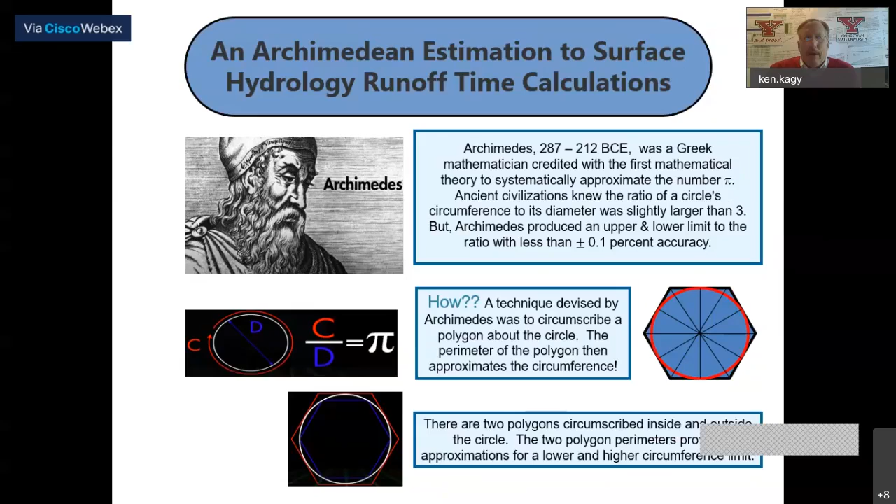So he devised a technique. He circumscribed a polygon about the circle and inside the circle, and was able to use the Pythagorean theorem to estimate the edges of those triangles. He drew triangles from those polygons, and the more polygons you have, the more accurate that estimate is going to be of the circumference of the circle. So I think he started out with a six-sided polygon divided into 6 or 12 triangles, and then kept increasing it until he felt he had enough triangles to estimate the arc of the circle a little bit better.

Back in about 250 BC, he had a 96-sided polygon, and based on the outside and inside of that polygon, he estimated pi was somewhere between 22 over 7 and 223 over 71. That was within about 0.1% accuracy, which is amazing considering he didn't have a calculator. In fact, they didn't even use decimal points back then.

So all they had was fractions. He did some mathematically ingenious things, and he's also known for the Archimedes principle, where he used the king's crown. The king was concerned that his crown wasn't completely gold, so Archimedes was able to submerge the crown in water and estimate the density of the jewels and metal in it. It was amazing. He was probably the original master of rational thinking back then.

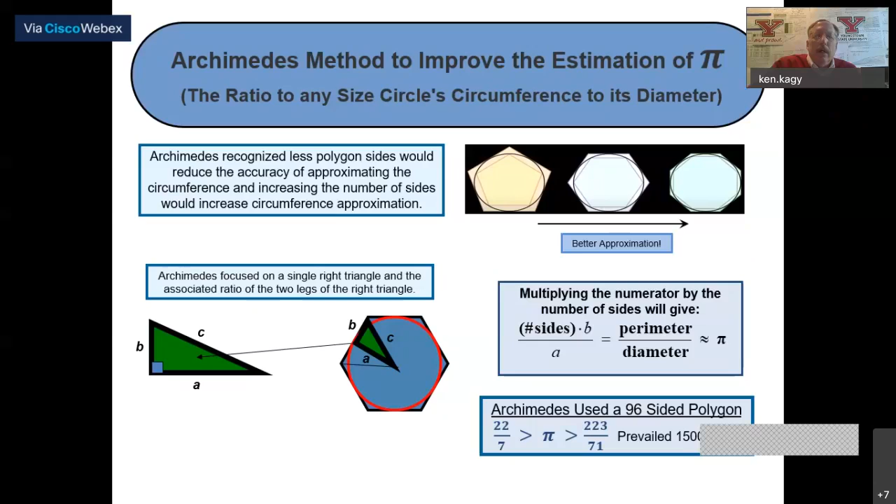But anyway, let's talk about how this really applies to hydrology. I'm going to start from some of the basics. I know some of the audience really understands these fundamentals, but sometimes I have people in my audience that don't understand the basics of hydrology.

Factors affecting stormwater runoff include surface conditions, soil type, watershed size, length of runoff, basin slope, and rainfall depth. Those are all different factors that affect this. What we're going to look at in this study is 4 different types of surface runoff coefficients that are commonly used. We're going to evaluate and compare those runoff coefficients.

We're going to use NRCS's segmental equations, sometimes called velocity equations, and graphically display what those really look like. Then we'll look at 3 different time of concentration empirical equations, and compare all 4 of these equations in graphs.

So this is the basic definition of time of concentration. Basically, time of concentration is the time required for the most remote hydraulic distance in the watershed to reach the point of the basin outlet. That's a fundamental part of hydrology theory, and it's certainly important in estimating peak flows, because time of concentration is necessary in all the calculations used in hydrology.

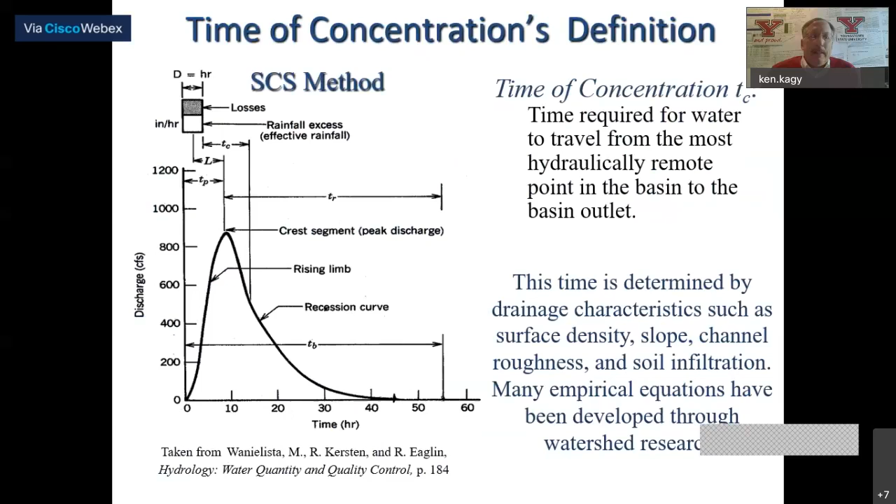In fact, I've talked to other professors about this subject, and they say it's probably the least understood parameter of hydrology, and where most of the errors are. I see that in my thousands of reviews of hydrology reports - there's just lots of errors in this particular area.

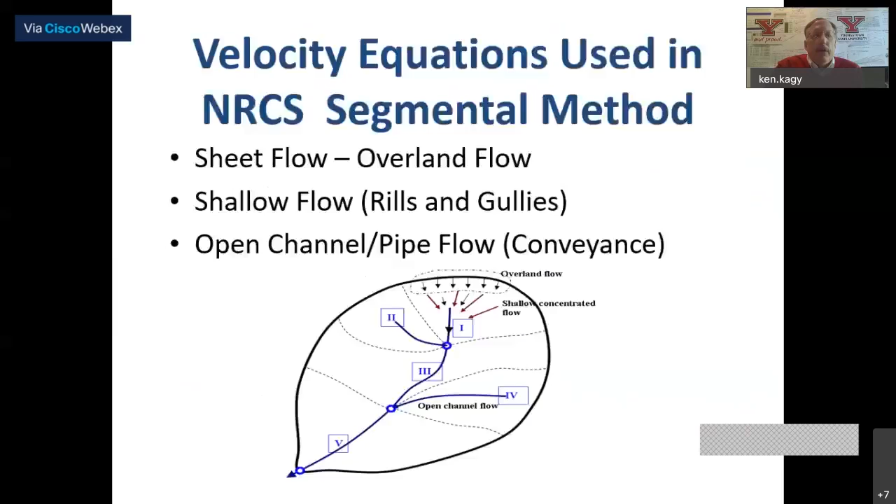So the first one we're going to talk about is velocity equations and NRCS segmental equations. You've got sheet flow, shallow flow, and open channel flow on a watershed basin. The first one is sheet flow, which is estimated by the Manning's kinematic wave equation.

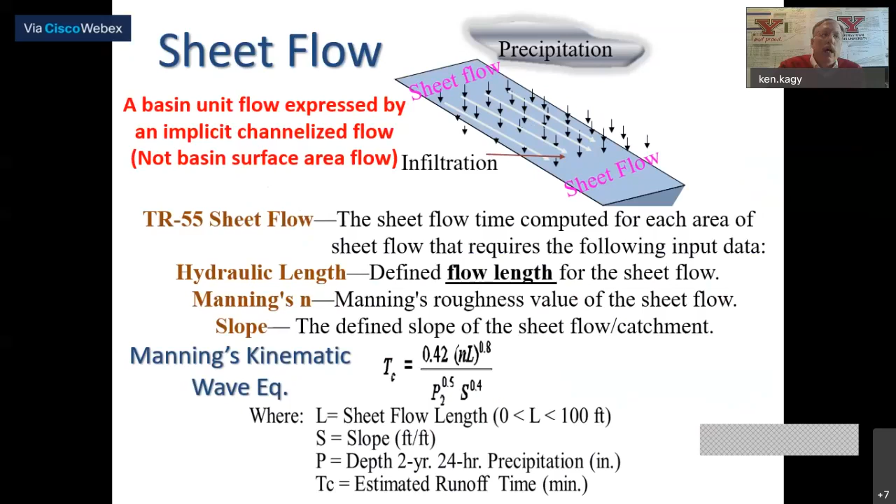Here's the equation itself. Most of you are familiar with it, and it's a very common equation used for stormwater runoff in a lot of areas. These are the Manning's coefficients used for sheet flow, which are different from the Manning's coefficients used for channel flow, because NRCS considers sheet flow to be less than 1/10 of a foot.

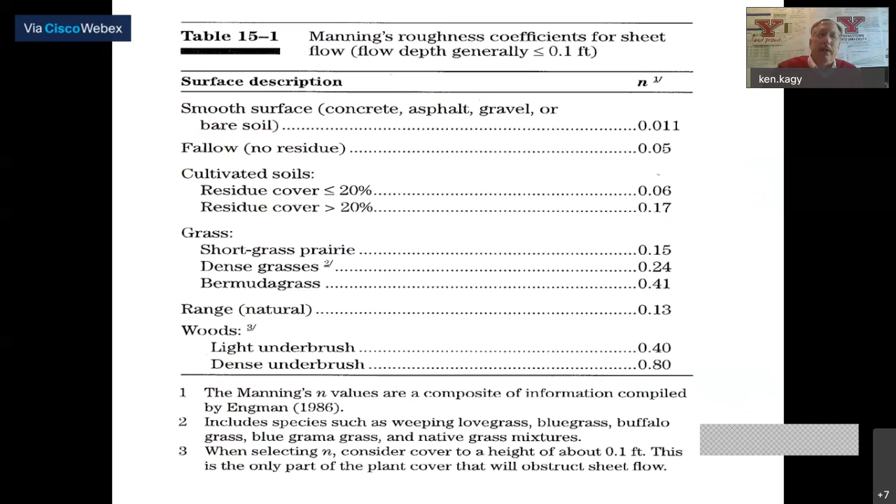That's a significant difference in the type of coefficients you would use. I've seen in practice that people don't differentiate between those coefficients sometimes - they're using channel coefficients for sheet flow and channel flow. It does create a bit of a problem.

Over the years, in 1982, Kibler and Aaron indicated the maximum flow length is less than 100 feet for sheet flow. Dr. McCuen, who I've spoken to on this particular project, came up with equation 15-8, which is in the National Engineering Handbook. It gives you a rough estimate for the length of flow you would use for sheet flow.

So what I did is take the Manning's low value for sheet flow and the high value, and came up with an average, knowing what that related to percentage-wise for impervious versus very pervious surfaces. I took the extremes and plotted that out graphically just to get an idea. What I'm trying to do is get a reasonable distribution in your n values - they may or may not be evenly distributed, but I wanted to see where these n values fall between the extremes of a 1% impervious surface and a 99% impervious surface. So I used exponential, linear, and polynomial equations, and averaged those out.

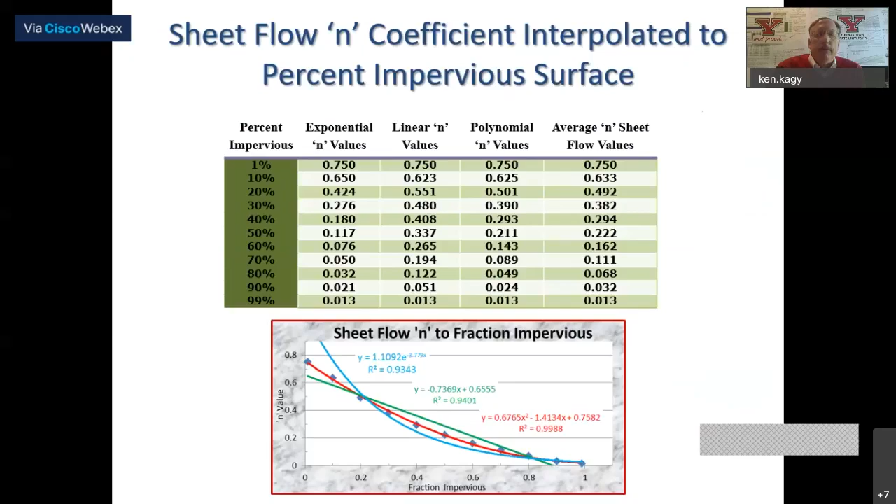And so I just re-plotted that out and got a fairly reasonable distribution. Next, we'll go into shallow flow.

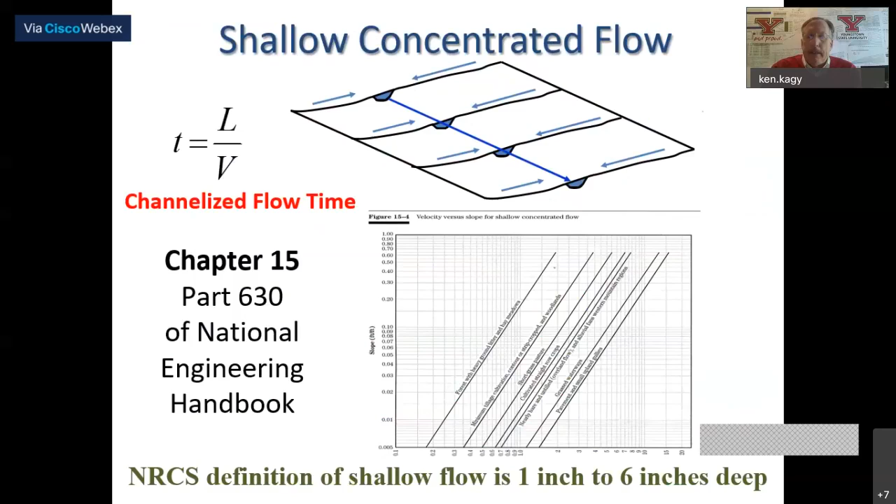Concentrated flow - the engineering handbook has a chart in there for different types of runoff, surface runoffs. NRCS considers shallow flow to be from 1 inch to 6 inches deep. That's what they consider shallow flow. And so they have created some of these velocity equations based on that depth.

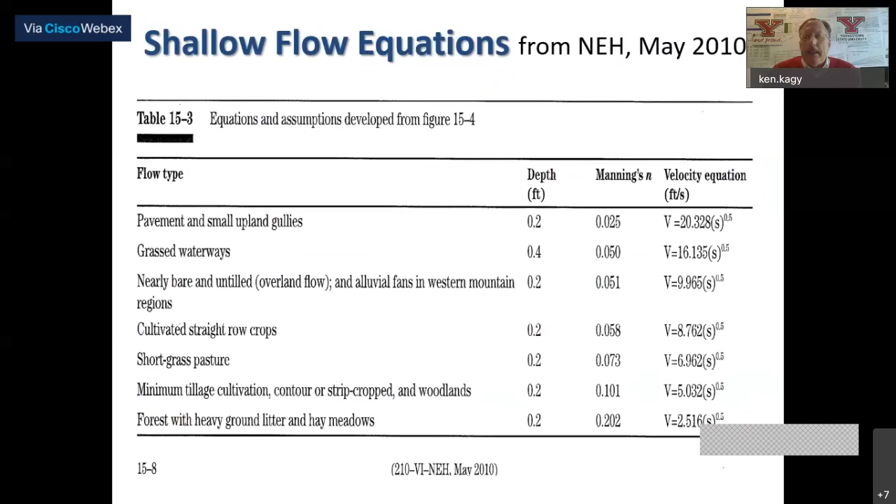And this is from the engineering handbook. And so I just took, and you can recalculate these velocity equations - it's just taking Manning's n value and the depth and coming up with a V equation from Manning's equation. And so I established a whole set of velocity equations based on my distribution of my n values that I just recently calculated, and a flow depth of a quarter of a foot, a little bit deeper, but not much.

Open channel flow, this is Manning's equation, and that's usually what's done. But what I've found in practice is that most people don't really know their channels that well in the basin. And so they're just taking an average shape and size of the channel flow and guessing that that's what their channel is going to be. But obviously the channel is going to change as it runs through the basin. It's going to change in size, in width, and it's going to change its characteristics as it goes through.

But I'm looking at some smaller watersheds here, and so in these smaller watersheds, you can do the same thing you do for shallow flow, as long as the flow depth is small and wide in the channel. And so we were going to take that assumption. Then you can do the same thing - you can create velocity equations.

NRCS considers anything over 6 inches or deeper to be channel flow. I did an initial 8 inches and increased it up to the maximum of my watershed size, up to 16 inches of depth, so I had an average about 1 foot depth. And that's, if 18-inch pipe inside a watershed basin, that's a pretty reasonable assumption.

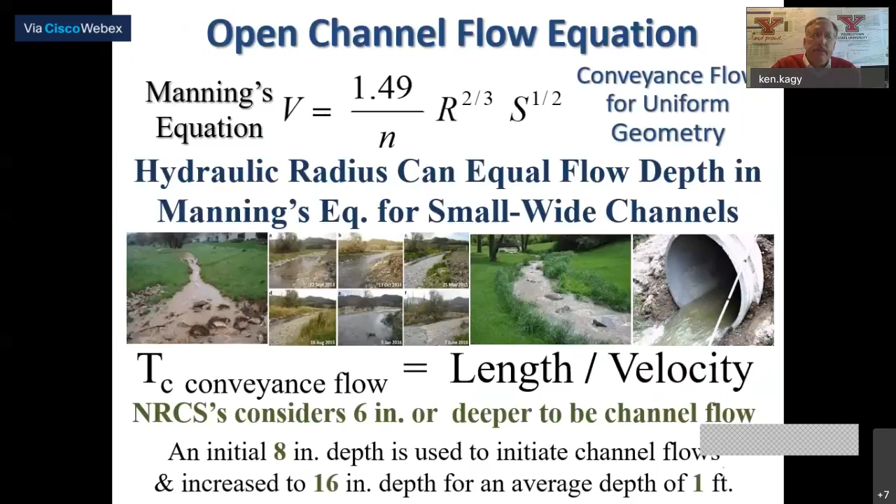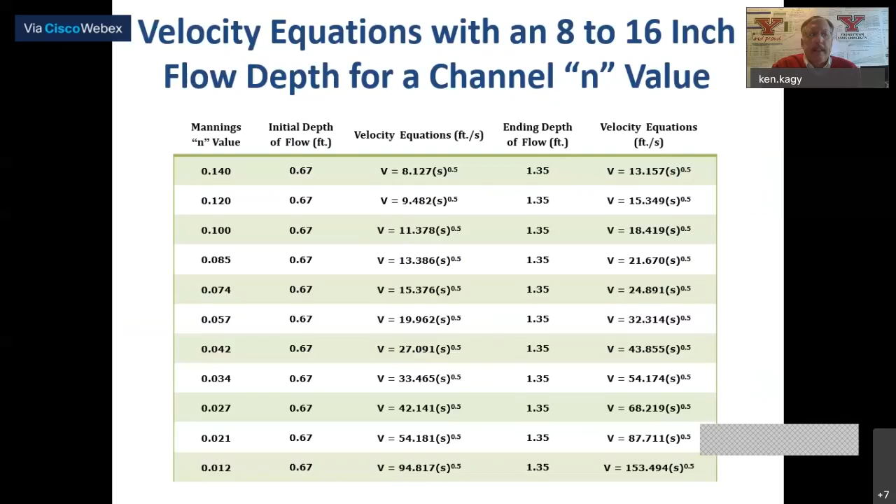These are Manning's N values for channel coefficients here. Most of you are familiar with them. And so then I went through and calculated out these velocity equations based on Manning's N value and initial flow of 0.67 foot, and then of course 1.35 feet of depth.

So in calculating hydraulic time calculations in the velocity method, you take all 3 of these - sheet flow, shallow flow, and channel flow - and you add them all together. You sum them all up, and that's what you use for your time of concentration. And I can tell you 95% of the reports I see use this method right here for calculating their time of concentration.

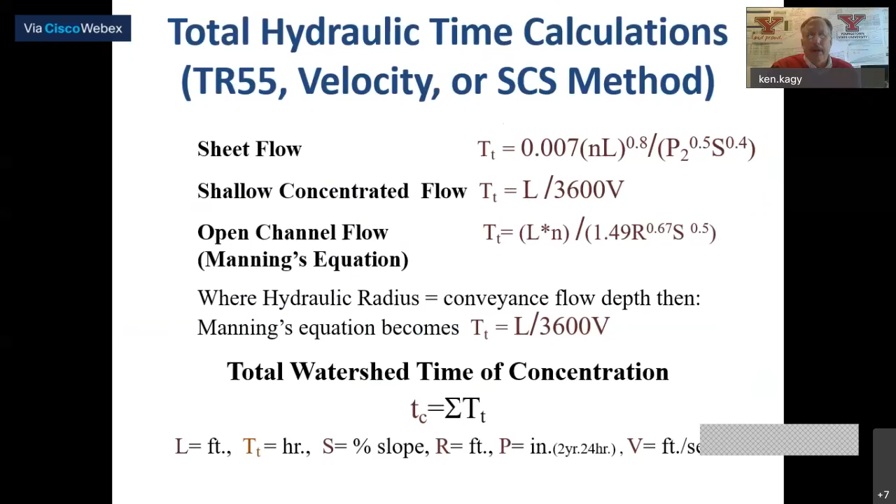For time of concentration, and it has its issues. It's certainly the big issue it really has is the sheet flow. And there's been a lot of debate on sheet flow. We can discuss that later on, but that's one of the biggest issues you have.

So I'm taking McCuen's equation here, and I'm limiting my sheet flow basically 90 to 110 feet for my more impervious surface, and then I'm dropping it down 10%, just as my increments of the surface conditions also drop down by at least 10%. Remember, I distributed out even 10% - the 1, the 10, the 20% impervious. And same with the shallow flow. So I did 400 to 500 feet, which is what the National Engineering Handbook recommends for length, about 3 to 4 times the sheet flow.

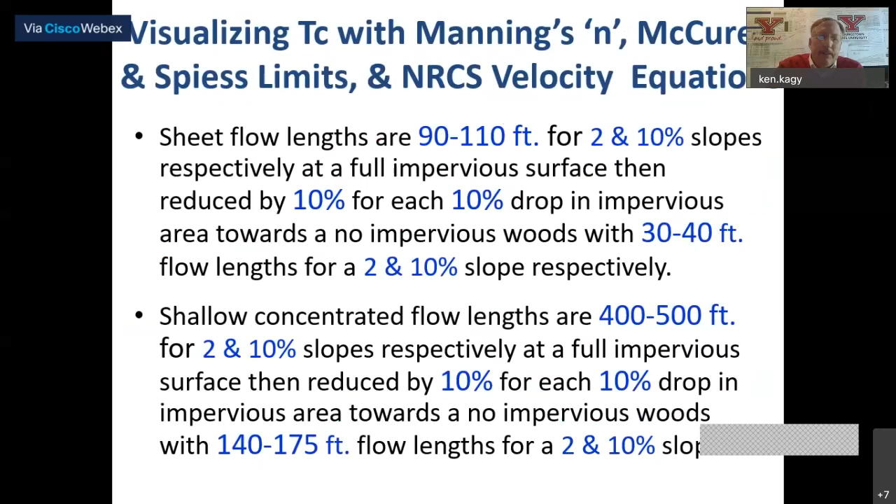And in actuality, if you want to get an accurate measurement, you should actually go out and visit your drainage basin and actually take some of these measurements. But I assure you, nobody really does when they do these calculations.

So now we're going to try to visualize this. So the remaining flow path was considered channel flow, the deeper flow, and the equations considered for flow are the path geometry, slope, and surface conditions, all considered homogeneous.

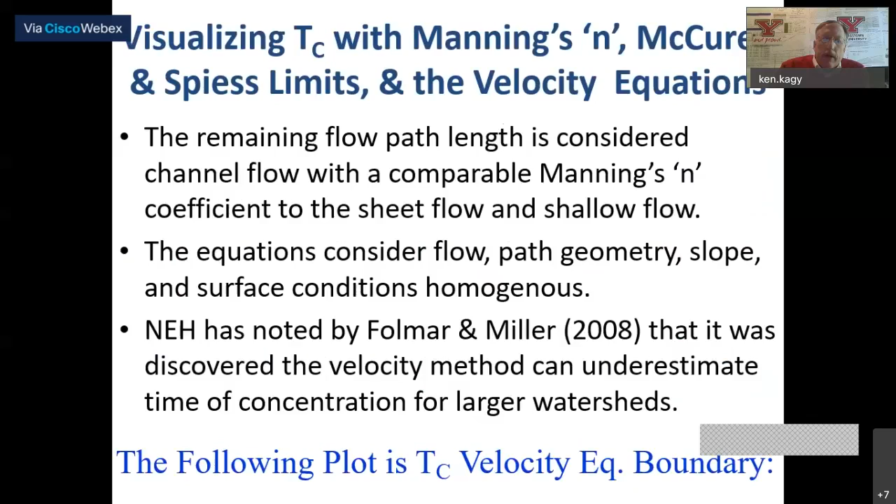Following were interpolations for relationships of percent impervious using the CN value, the C value, and N values. I calculated those out using the velocity equations based on my distribution of those values.

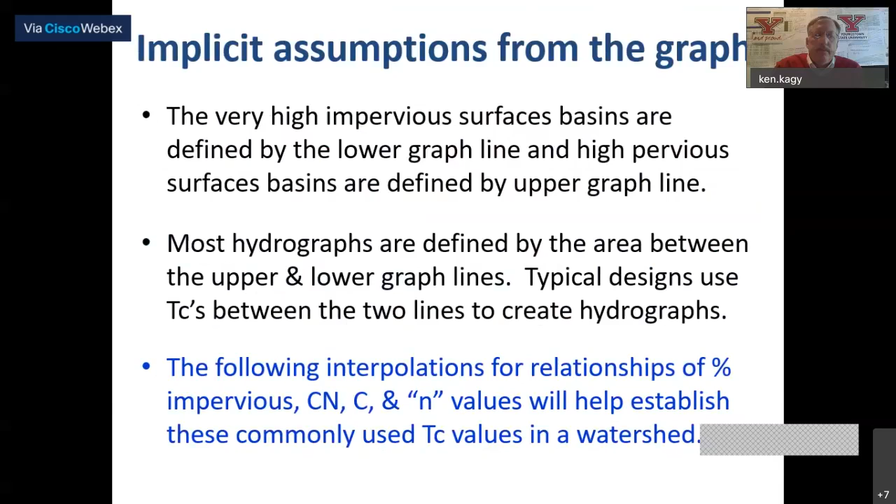So here's your CN values. This is a common chart for CN values. And I took an average.

I took it for all soil types, and this is a standard chart that relates to the percent impervious for the different CN values. It's in the engineering handbook, NRCS's engineering handbook.

So, with that... hang on, there we go, sorry.

I did the same thing with C coefficients, soil types. You can see I had some difficulty with the C values because C values seem to be area oriented, and everybody puts everything in the C values. I found that C values are not as well defined as CN values. Let's put it that way. That's the easy way to put it.

They incorporate slopes into C values. They incorporate, of course, these common percent impervious surface values based on the same description you saw in the CN values. So we can relate those C values based on this table.

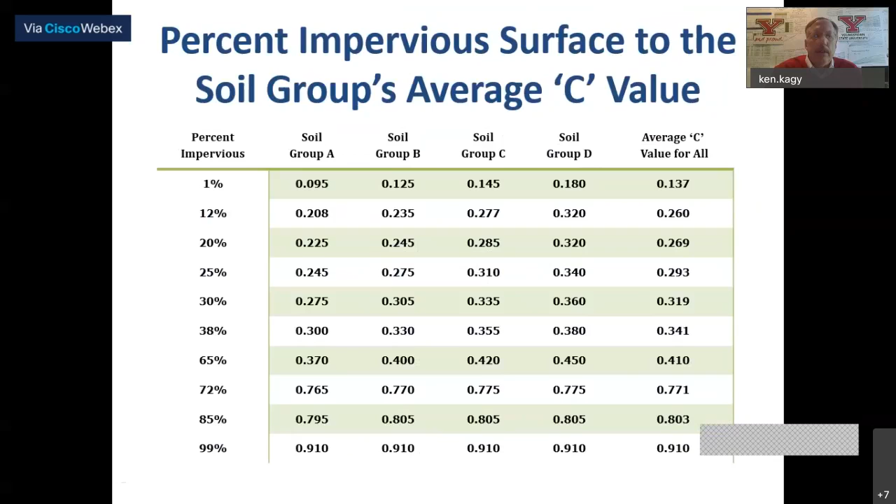So now we've got a relationship. These values are plotted in the following graph. Now we've got a relationship between CN and C values. And here's what it looks like.

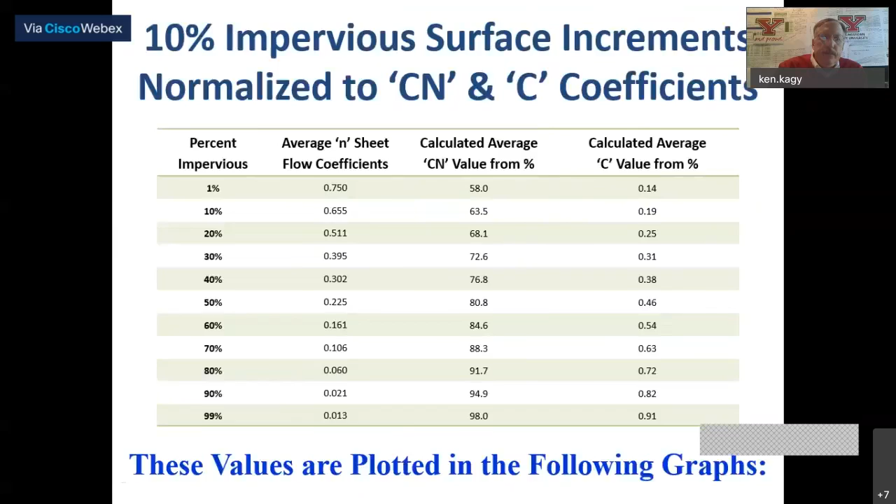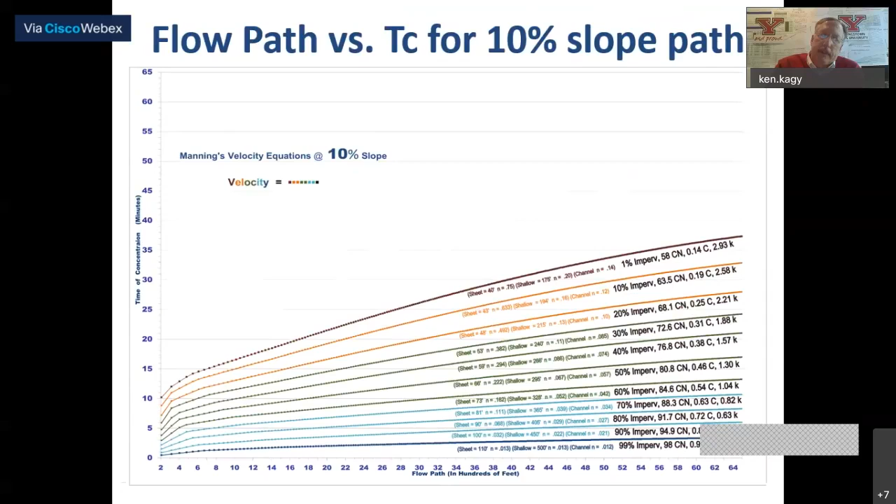Here's what 10% looks like, and now you can see they really start to compress. But we have something to compare to, with N values, with CN values and C values. They're all related now, with impervious surface. Everything is tied back to impervious surface.

Another equation I looked at was the Kirpich equation, which is somewhat popular, but it's set up primarily for smaller watersheds, 1 to 112 acres. It was studied for 7 rural watersheds, with a basin slope from 3 to 10%.

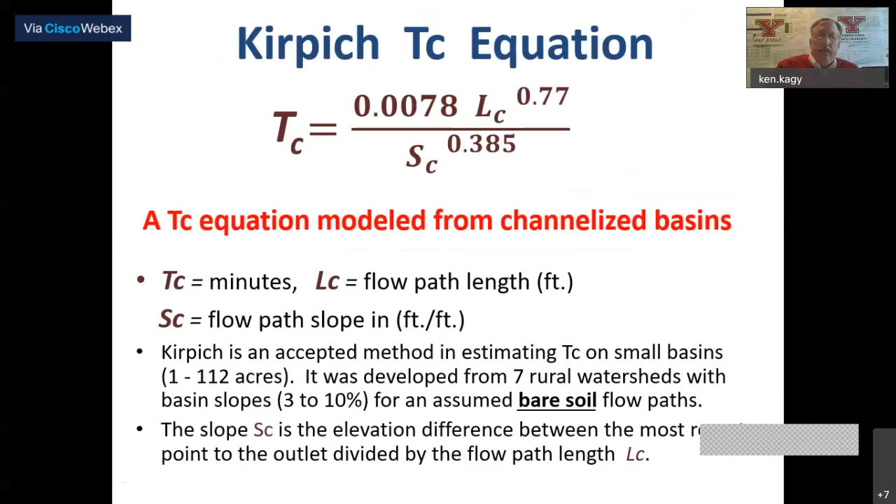So the area or study it was done on was pretty much the type of basin I was looking to compare with. And this is the equation. So you have a length in there and you have a slope.

So I plotted that. The problem with the Kirpich equation is, Chow had values for overland flow for natural grass, overland flow for bare soil, and flow on concrete or asphalt. The problem is I didn't really have anything for wooded areas — nothing on the high areas.

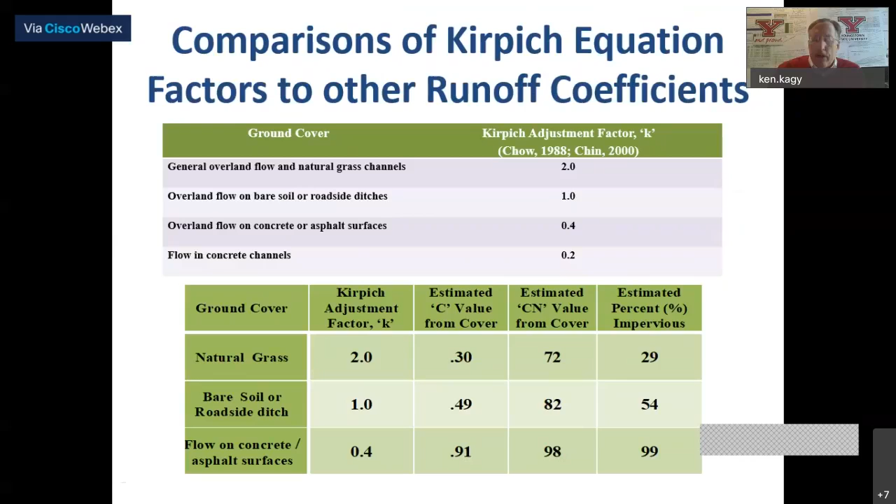So I related these based on the description to the same percent type of surface, percent impervious surfaces, for an estimated C value, estimated CN value, and estimated percent impervious. I plotted those out and I'm calling it the K value. So what we don't have is a K value for the Kirpich equation on the wooded end, so we're going to have to extrapolate a little bit, which is sometimes a little dangerous, but we didn't have to extrapolate too far, so hopefully it's not that big a risk.

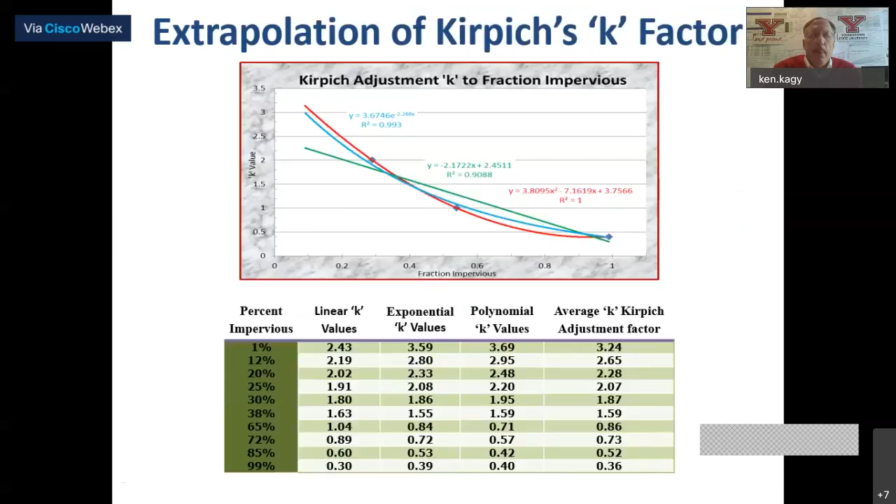So I compared this, calculated it out just like I did with the n values. As you can see, I did linear, exponential, and polynomial equations, and came up with an average for each type of percent, from the initial 3 plots. Then I recalculated and replotted it, and came up with an estimate for 1%, which is about a K factor of about 3.

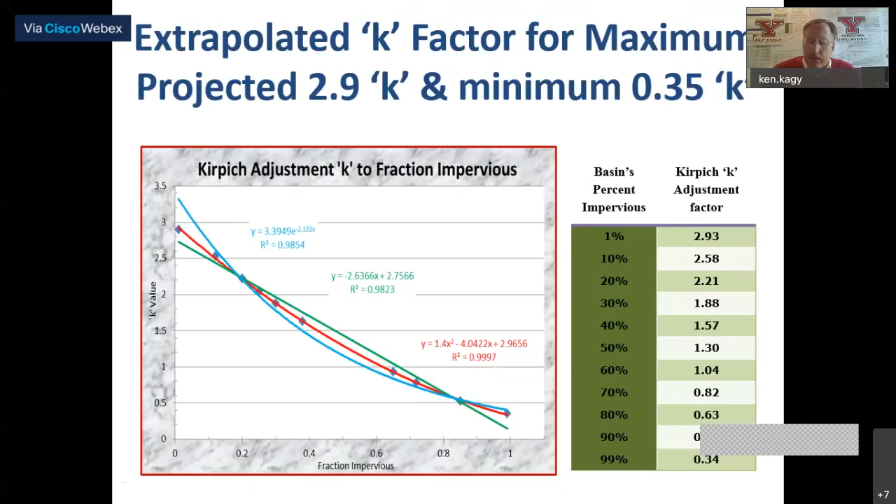That's an area we don't really have any research on, so we projected it out from extrapolation. Now I've got a table that relates impervious surface to CN values, to C values, to Kirpich K value, and the N sheet flow coefficients. You can see here's this table.

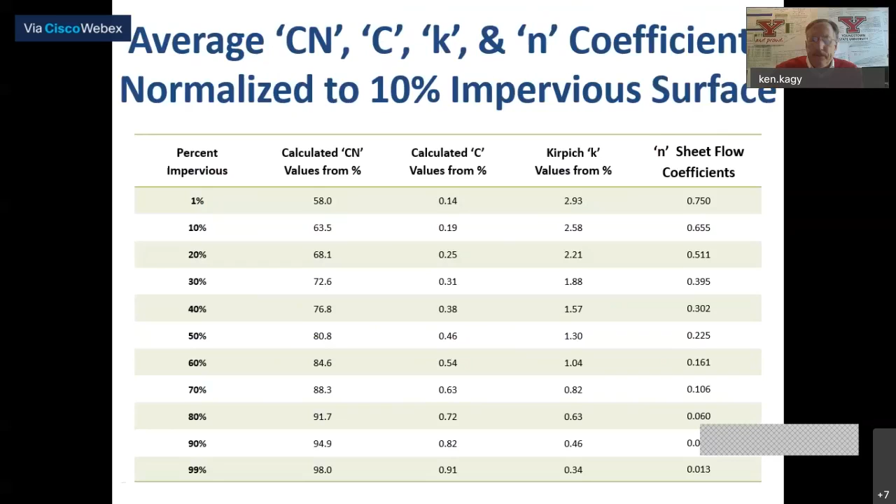The NRCS lag equation is a very popular equation. I've seen that if they're not using the velocity equations, most are using NRCS lag equations. We looked at it - it was developed by Mockus in 1961, for areas less than 2,000 acres. That's a bit bigger basin than what I was looking at, but it still fit the description. Plus it's very popular, and it has a CN value in there. It's basically an equation formed on basin surface data or surface conditions.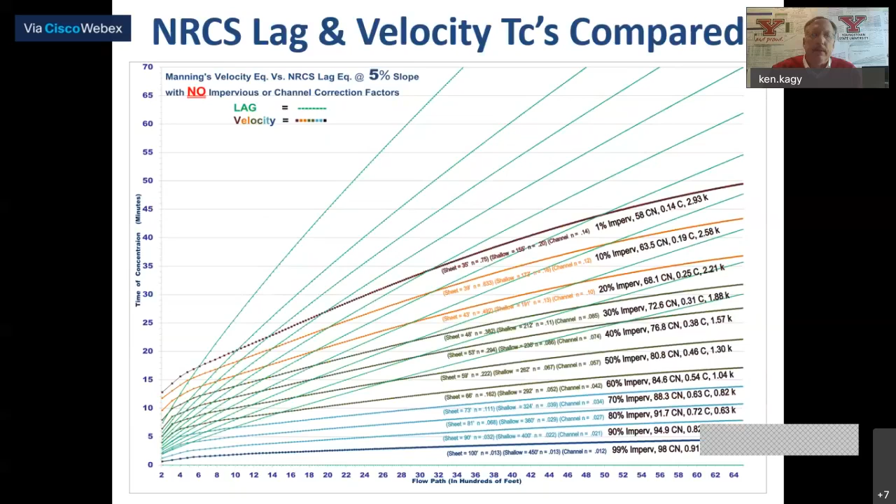But the Federal Highway Administration, in HEC 19, developed this adjustment factor M, and applied it because they felt that NRCS wasn't always working with farmland - where Mockus developed his time of concentration equation - on agricultural type land. So they added an impervious factor, this M value, and a main channel or man-made channel factor to this.

If you take these factors, I already had a relationship for CN values to impervious factor - I know what that is with the table I just created. The main channel factor is a bit of speculation, but the fact is above a CN of 80, or 85 especially, there's going to be a lot of man-made channels in that type of development or surface condition because there's a lot of impervious surface.

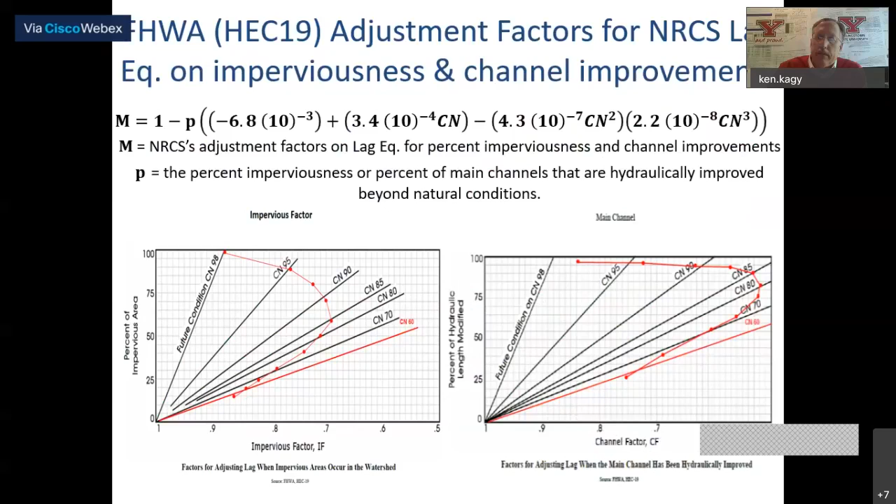So if you take those factors and add them to the lag equation, the lag equation then falls in place with the velocity equations. This is what it looks like at 2%, with a systematic crossing of the velocity equations. Here's 5%, and here's 10%.

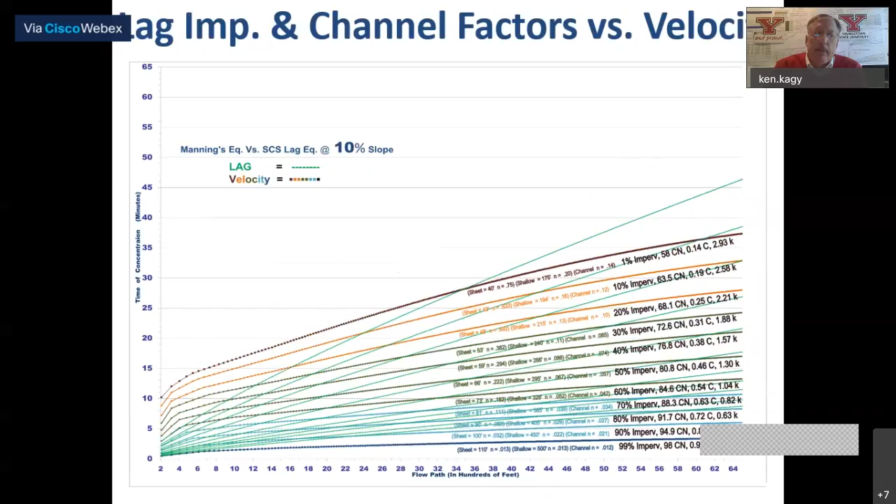Another equation I took a look at was the FAA equation. This equation is sometimes, or quite often, used in urban conditions. It was based on surface data or surface condition. There was no channelization consideration in this equation, but it was done on airports, and developed by the Army Corps for the FAA.

I really like this equation because when we plot it compared to the velocity equations, it has almost an identical shape, the curve, to the velocity equations, but there's no channelization factor. I've done a lot of research on this equation - if anybody has a channelization factor for it, I'd certainly be interested in talking to you, because it almost fits these velocity equations. I've found that without that 1.8 factor in there, it drops down real close to these velocity equations. In fact, Texas had a modified FAA time of concentration equation.

I think they use 0.7 something as a factor rather than 1.8, and it almost puts these a lot closer to being in line. But I wanted to show this as a comparison because this is what happens when you don't have channelization in your time of concentration calculations.

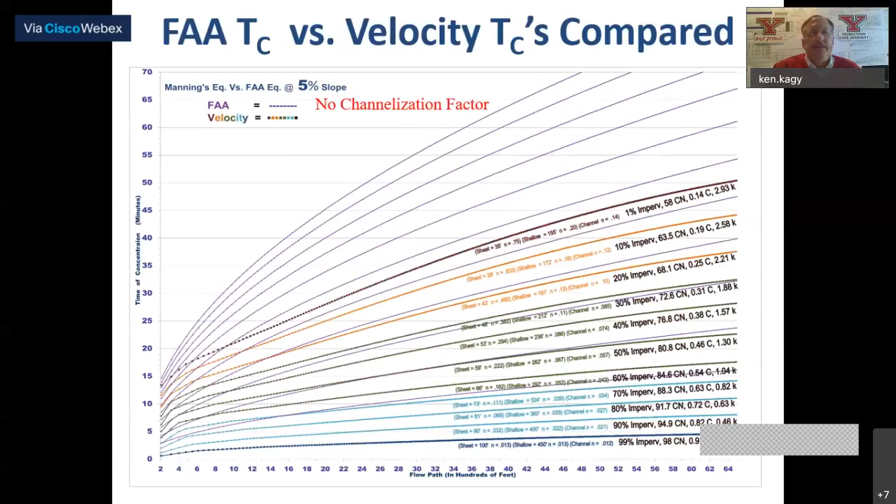So looking at this small watershed runoff response, the time of concentration comparison graphs between the velocity equation and channelized empirical equations convey a systematic intersect for each related surface coefficient. Empirical equations provide a lower time of concentration in short flow, and the empirical time calculations provide a higher time of concentration on your longer basin flow paths.

Runoff time on small basins exhibits a transformation from surface attribute flow dominance to channel attribute flow dominance. So I just refer to this as timing outside the channel and timing inside the channel. You can see that in that pattern just by the way they cross.

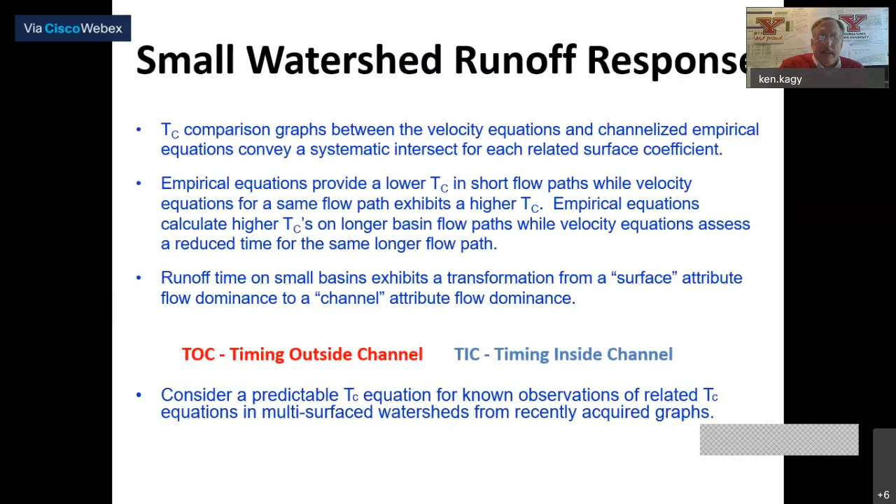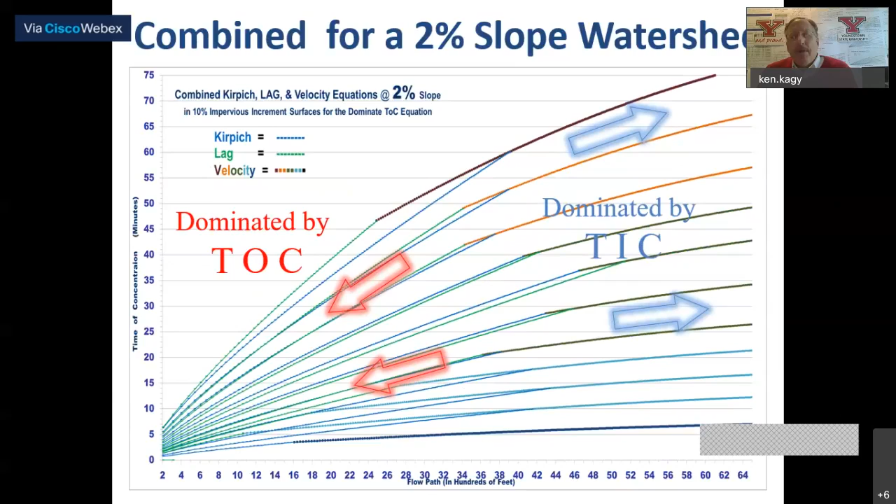So what can we do to create something that's a little more predictable for time of concentration? What I did was cut off the areas that were in question. You can see here that I cut off the velocity equations where the lag and the Kirpich equations dominated. The lag is in green and the Kirpich is in blue, and they almost intersect the velocity equations at almost the same place throughout that pattern.

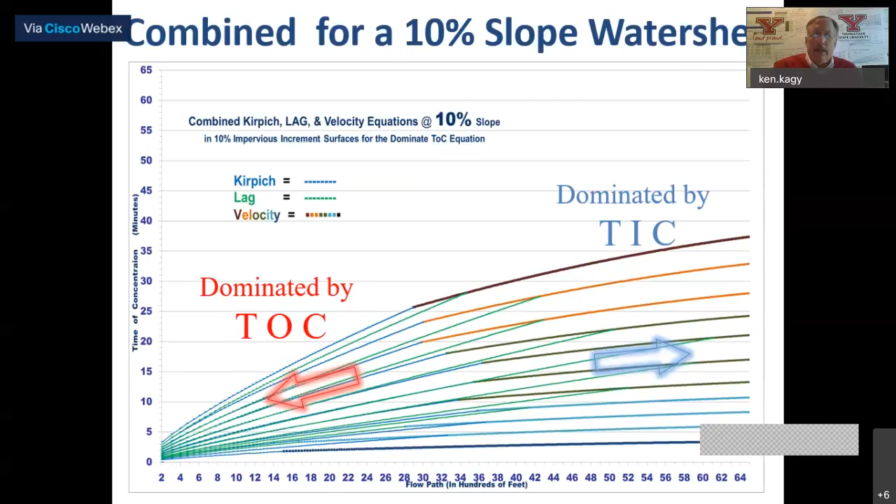This is for a 2% slope, and this is for a 10% slope. So it's very consistent where they cut those velocity equations off at.

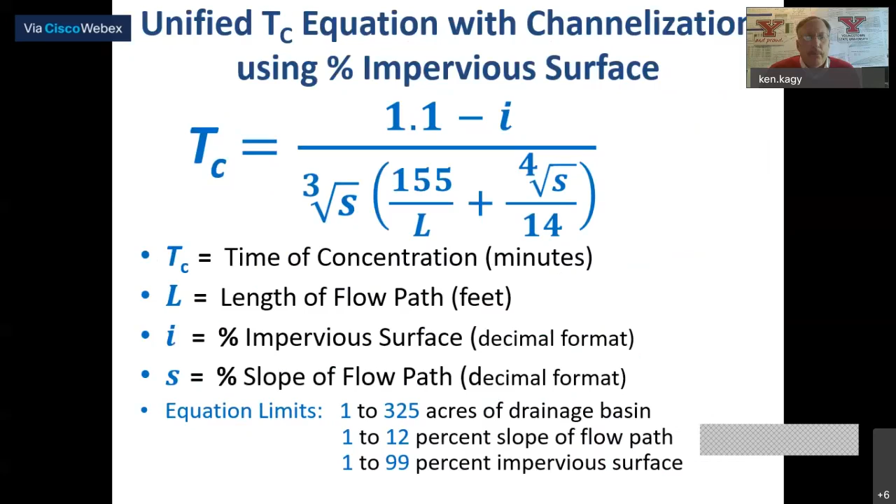So if you take that, I came up with this equation that fits those types of curves or those types of equations. This one's set up for impervious surface, and it basically just has the length of flow path in it, percent impervious surface, and the slope in there.

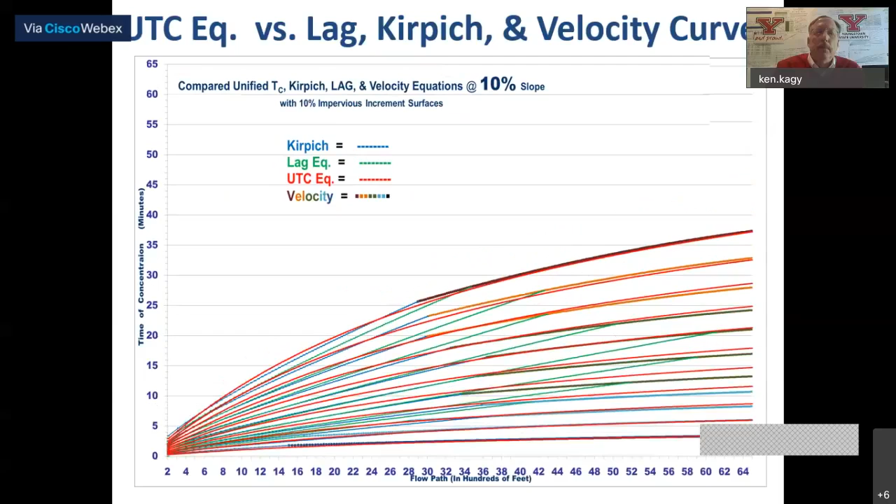Here's what it looks like plotted out for a 2% slope. So now you have all four equations. I call this the unified time of concentration equation, but this is for a 2% slope. The red lines are kind of mimicking the pattern we're seeing between the velocity equations and the empirical equations. Here's 5% slope, it even looks a little better. Here's one for 10% slope, so it still fits.

And you can see this is basically the same equation, but now I'm using the CN value. I found this one to be even more accurate and more precise as far as matching those curves. But anyway, all we have is a CN average in here, percent slope, and of course the flow length.

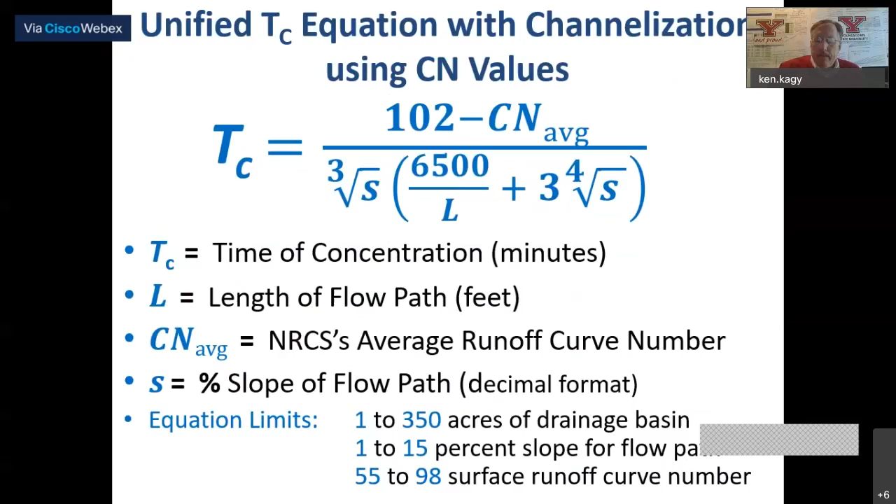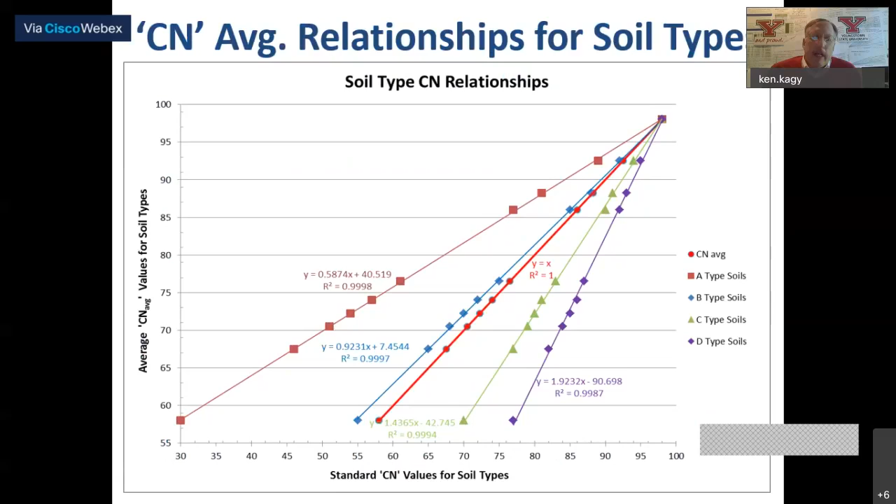And remember this is a CN average. So what, in some cases, some of your soils may not be an average. Well, they're not going to be an average. Most soils, you can see the red line, the CN average fits very closely to the B-type soils here. So if you've got other soils on here and you want to adjust for those types of soils, then you would use this particular equation to adjust.

This is the one for C value, and you can see it's the same format, same type of equation. Again, the C value is not as well defined, so I had a little bit more difficulty trying to come up with a pattern.

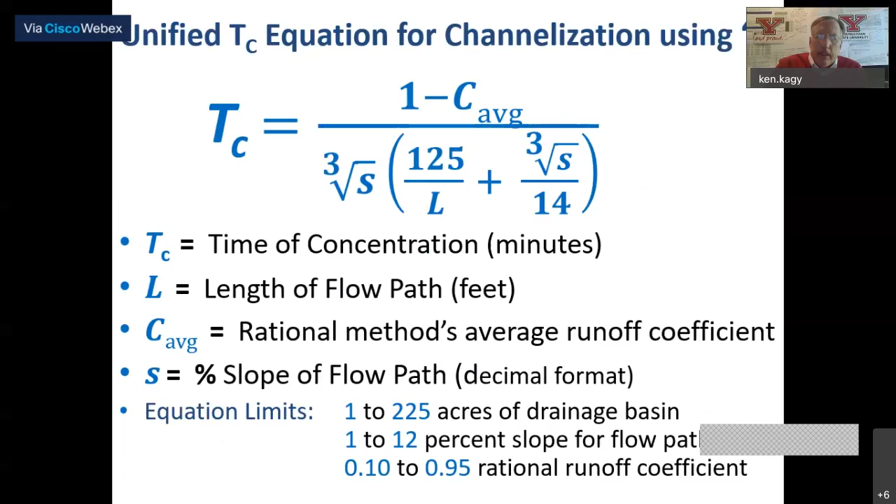So what I did was, besides the earlier chart you saw from Pennsylvania State, I grabbed another one from Iowa, and you can see now that they've got flow depth for a 5, 10, or 100-year storm event. They got the same categories that CN value has. So there's a lot of these charts across the country, but everybody's just slightly different.

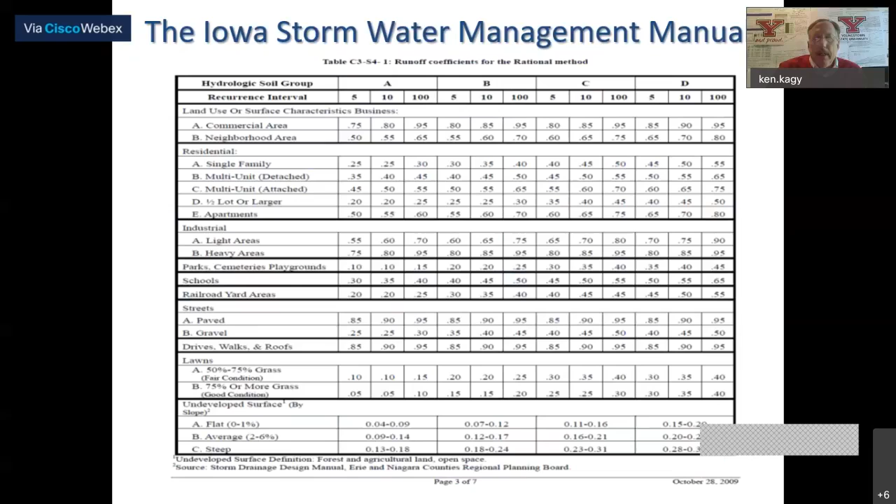So here's one for Colorado, and again it's slightly different. It's got a 2, 5, and 10-year storm events. So to me, the C value is a little more complex. It's got flow depth in it, it's got your percent impervious in it, and so there's a much wider range for the C value.

Rossmiller came up with an equation for calculating a C value based on a CN value, and there's that added complication. I've also seen simple definitions where the C coefficient is just runoff over the rainfall event or rainfall depth, and that's how they calculate the C value. So there's no real standard for that C value yet.

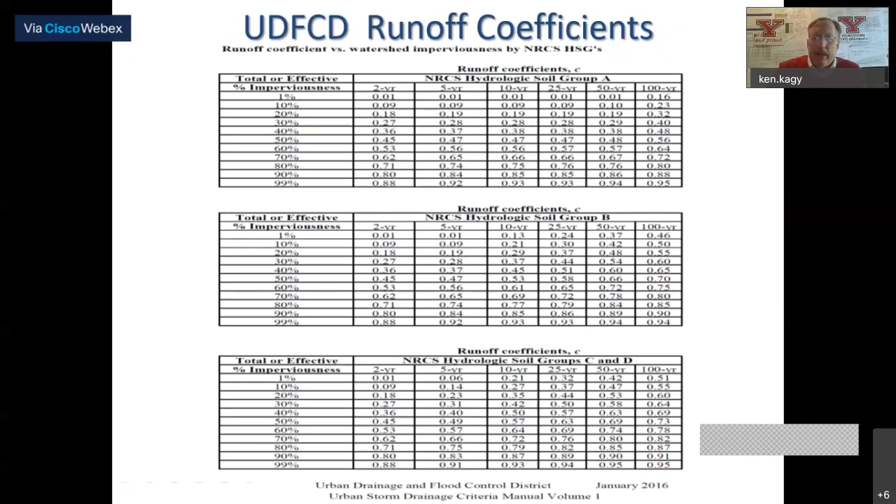But anyway, I compared it. I used 10-year storm events for those areas and plugged that into the equation to see how it looked and compared. This one's for Pennsylvania at a 5% slope, taking into consideration more flow depth since I'm not using just my typical 3-inch flow depth, but going up to whatever that area is—Pennsylvania was about 4.5 inches for a 10-year storm, so I used that here to compare.

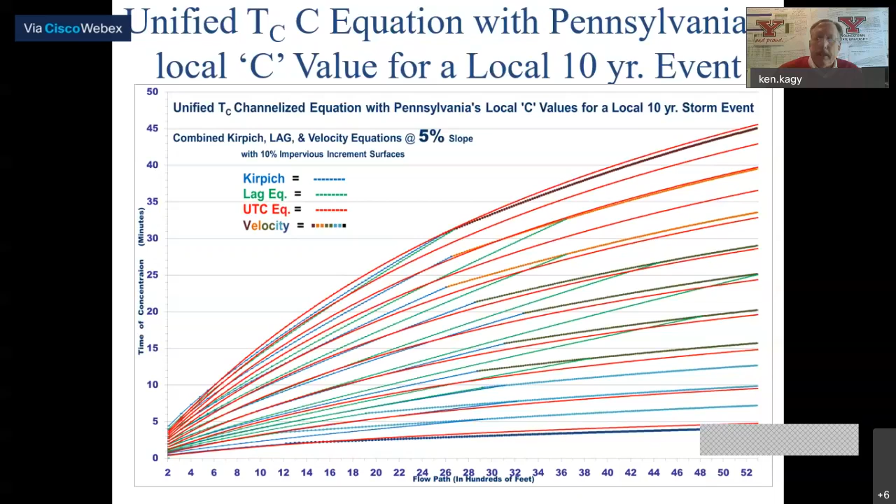This one's for Pennsylvania at 5%, and it does fairly well with that equation. And this one's for Colorado, also doing a pretty good job at 5%. I didn't show the 2 and 10%, but it shifts the same way with the slopes and matches up pretty well with the other equations.

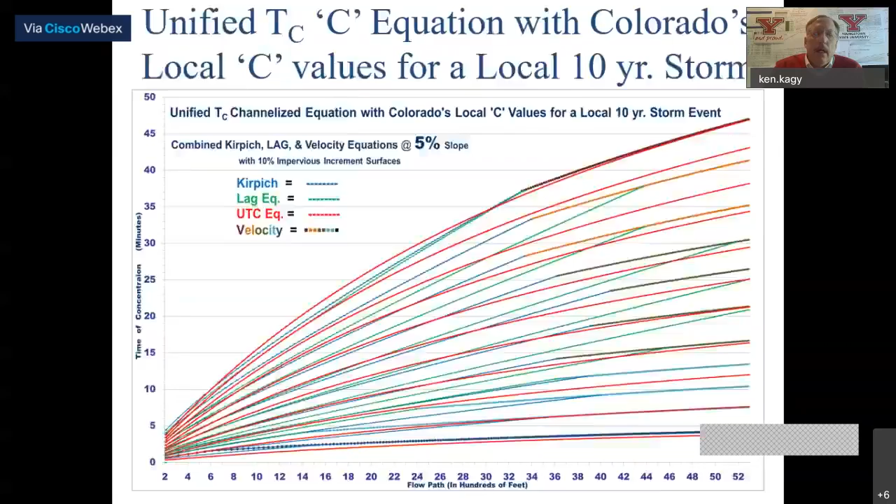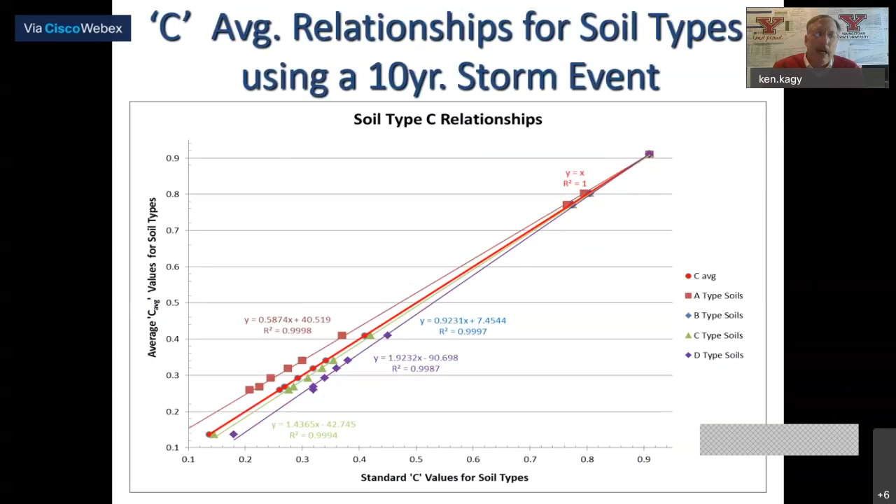Of course, we've got the soil types related now to the C equation, so you can adjust the C value based on your soils, but the adjustment is much smaller here. You probably don't need to adjust unless you're below 0.5—you can see they converge as you get above 0.5 on the soil type. Again, if you're a B-type soil, which many places are, C average works very well; I wouldn't do any adjustments for it. In fact, it lines up almost right over top of it. This is the equation you would use to adjust the C values.

All right, so this is my add-on here: what is the relationship between Archimedes and watershed surface runoff?

Well, for years we've known there is a relationship, and we've seen time-area diagrams showing almost a standard ratio. You can see on this graph it almost follows a ratio, but the problem is it depends on the physical system itself—each drainage basin is going to be a little different, so each would have its own ratio. But once you know it for a particular drainage basin, you can almost say there's a linear relationship there.

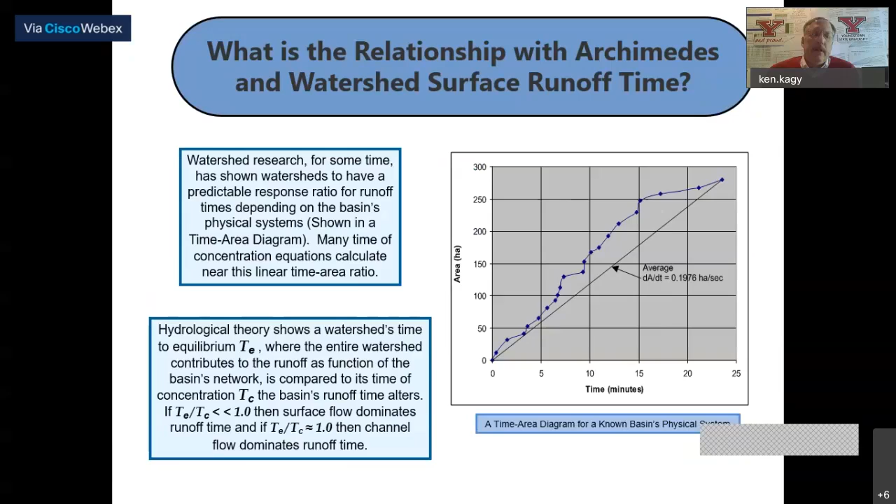The other thing known for a while is watershed time to equilibrium, Te, where the entire watershed contributes to the runoff—this is pretty much where it starts to get into the channels. Compare that to the time of concentration: if the ratio of time of equilibrium to time of concentration is very small compared to 1, it's probably surface-dominated flow. If the time of equilibrium is closer to 1, it's more of a channel-dominated flow. And we just showed that.

So what would Archimedes do to exploit this basic information, these truths of what we call hydrology? First, he would circumscribe the upper and lower boundaries, which I showed you in that one graph—saying we know time of concentration has to fit somewhere within these two boundaries. That's the same thing he did with pi, putting the circle between two sets of polygons.

The other thing is he would establish a relationship—one established by Mockus, who related time of concentration between the length of flow path and area, found in the NRCS engineering handbook. Then lastly, knowing that the ratio of time of equilibrium over time of concentration changes from a dominant surface condition to a dominant channel condition, he would establish that the confluence between time equations with the dominant flow types would show up where the intersection occurred—and we showed that in several of those graphs between Kirpich and velocity and lag and velocity.

Not that he inspired me to do this, but that was kind of a comparison, a quick comparison of probably a guy well known in history for his mathematical skills, and I always admired him for his thinking. He was the master of inductive and deductive logic. There's no question about it.

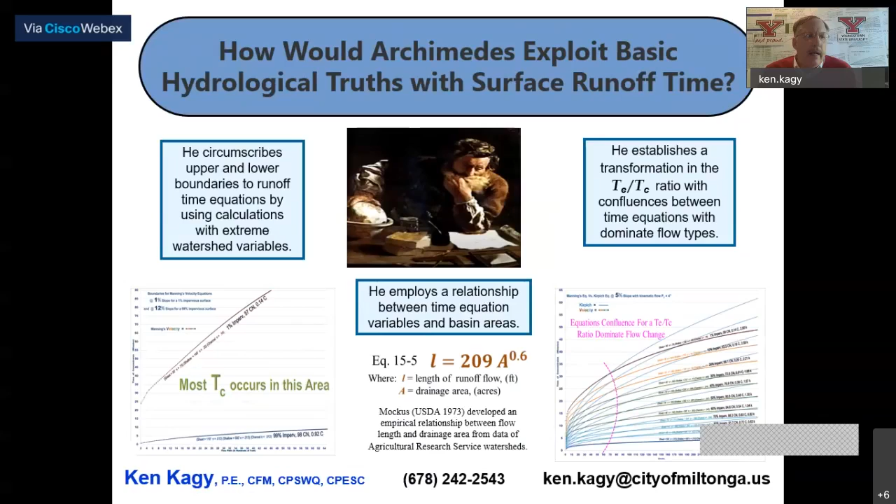So is there any rationale, other than that equation Dr. McCuen developed, where you have length divided by... I based it on that, I based it on his principle. His equation works well for pervious areas, but when you get into impervious areas, it kind of blows up on you.

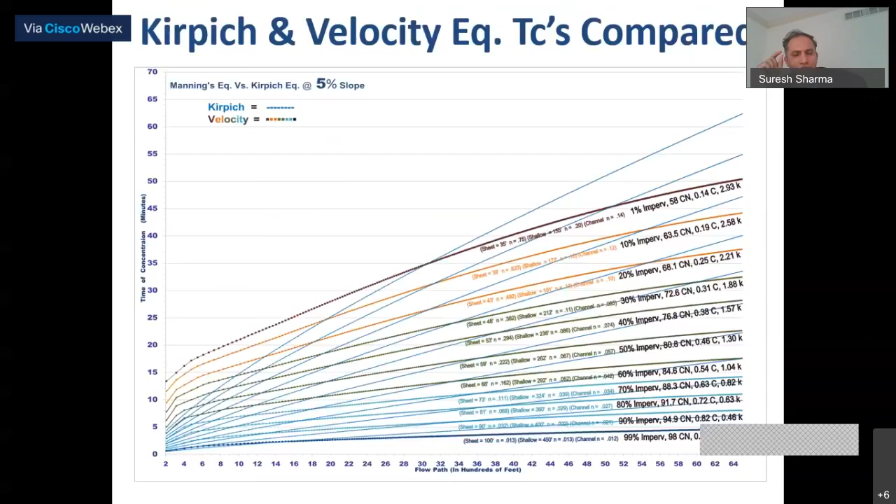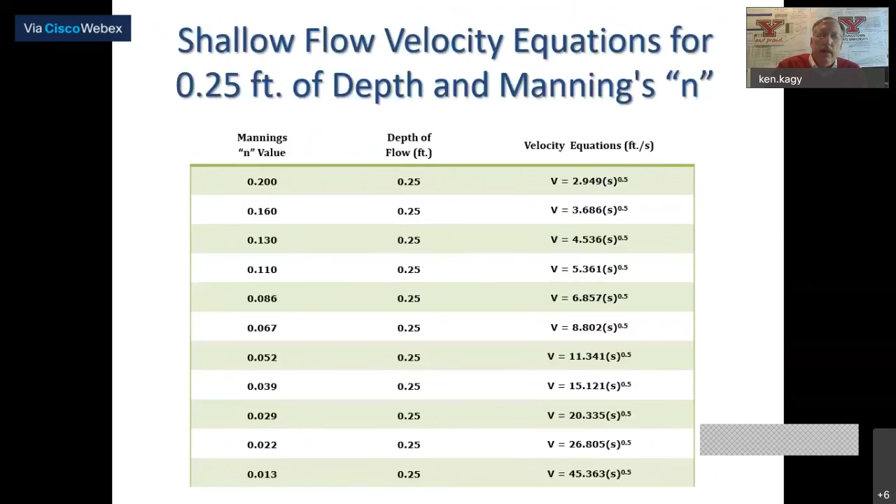So basically you took that paper to come up with that conclusion? Right, I took the basic philosophy that he says we need to reduce. Did he specifically say 10%? No, he did not, so I'm making the assumption.

L equals 100 times the square root of S divided by N. That's what he's saying the length should be. But if you use or try this equation, on very impervious surfaces this L blows up to like 1,000 or 2,000 feet, so it wasn't really practical.

We can assume your assumption was more or less correct, because when you plot the graph, all these equations fit together, they overlay with each other. So that means your assumption is not bad. If it were too far off, they probably wouldn't align.

All of them say it should be less than 100 feet for sheet flow, because it messes up your calculations if it's more than 100 feet, and I find that to be true.

That's why I took the 100 feet and started from there, because when you calculate the impervious down to the very pervious surfaces and use his equation, that 10% reduction almost fits. It comes in line with the impervious surface, because you end up with 30 feet and 20 feet at the lower end.

This was very interesting to me. At some point, with my students doing senior design projects and in undergrad classes, I used to ask them to use a different time of concentration equation, compare the results, and show me, because there are so many equations and we'd like to see which one actually represents the real scenario.

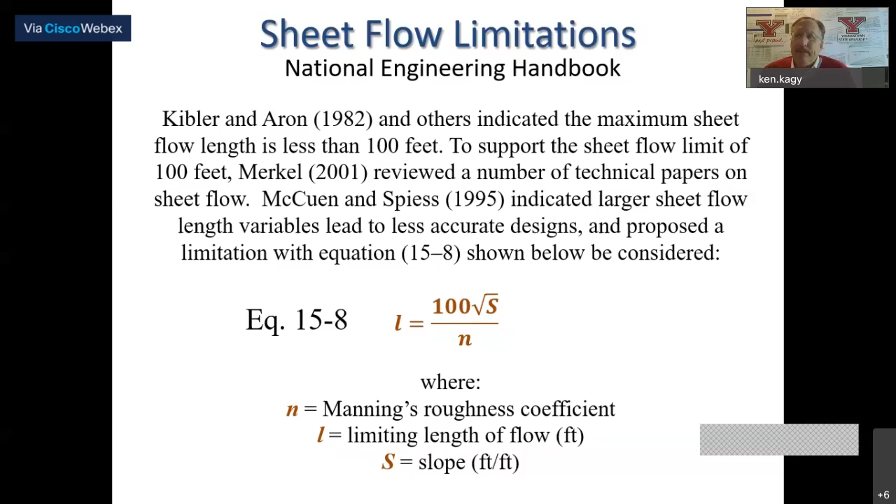Okay, thank you. Do you have any more questions? I think he doesn't. All right, Ken, thank you so much for organizing this event. Thank you for the invitation. I'll continue to have interaction with you in the future.